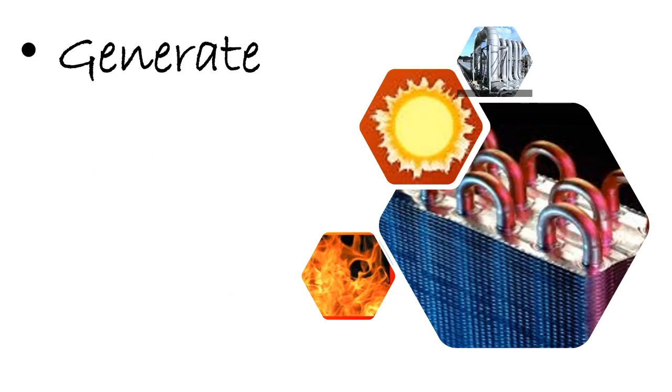Now, when we look at heat as utility people, as people who are ensuring the right amount of heat is available for the processes, we generally deal with generation of heat. That's where the boilers, heaters, or anything comes into it. And then we need to transport this heat from the point of generation to the point of utility where it is absorbed.

So our choice for any of the heating media generally depends on these three factors: how easy it is to generate, or what is the right method of generating it; what is the method of transporting it, and what are all the associated risks, costs, advantages, disadvantages with that; and then, how do we absorb it, when we are absorbing it, what is right to be done?

Okay, today's session, what we will do is, we will generally start from generation and then go to absorption, but we will go a little reverse. We will start at the usage point and then go towards generation. Why? Because it is important to understand what is the criticality at the usage point.

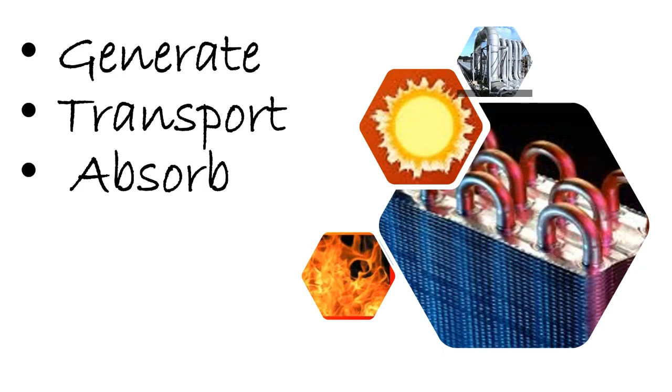Let me bring you into some of the typical applications. Now, these are just a few examples I have taken, this is not the entire list as such. If you really look at the processes I have given, it's very easy for somebody related with the textile processing unit to understand the dyeing process.

Now, when it comes to drying, there are various kinds of drying possible in the industrial scenario. Cloth drying is one of it, food drying is another part of it. There are drying operations involved in rice mills, drying operations involved in desiccated coconut mills, which are all very small scale industries.

There are also drying processes involved for something like food manufacturing, let's say a noodle machine, there is also a drying process involved in that. So drying is probably the largest application that we see in our day-to-day life.

And of course, there is printing. Printing is not limited to cloth printing, there is paper printing, film printing, plastic printing, there are a lot of things. And distillation varies from what we see for alcohol production towards any of the chemical plants, the bulk drugs and chemical plants, we see distillations over there.

Similarly, reboilers, polymerization, film and packaging is something which is the modern day requirement. And of course, there is refining of edible oil - I am not referring to the refining of oil and gas, particularly the edible oil.

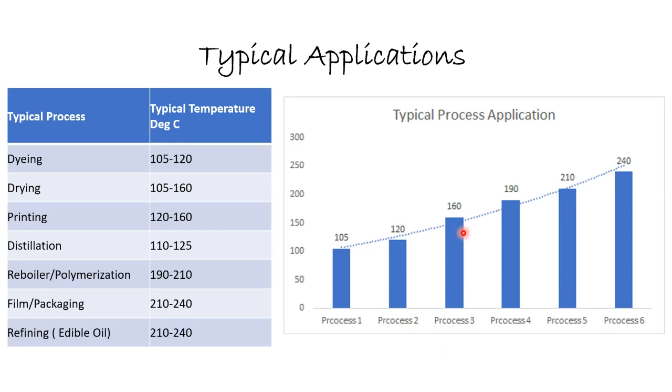Let me take you to one of the important factors today. That is what we call as log mean temperature difference. Many of you might already be knowing about it. Let me just brush up on this.

When you are absorbing heat and you have a heat exchanger, what you basically do is you put a heating media on one side and you put the media which has to absorb the heat on the other side. I have taken an example which is called hot oil and cooling water. Let us say there is hot oil going at 70 degrees centigrade, and water which has to be heated from 30 to 36 degrees.

Now, as the hot oil starts going inside, it starts losing its heat. As it starts losing its heat, the gradient is continuously varying. So the effectiveness of the heat, or if I divide this entire thing into, let us say, 3 sections, the effectiveness of the heat exchanger in one section is far higher in comparison with the effectiveness in another. So it is not only a single temperature, it is basically the temperature and area that matters.

If you have idea about finite element analysis, this is what people do. They divide the entire heat exchanger into small areas, and for each of these areas, how the gradient of heat between the source and the absorbent is actually varying is calculated, and then they design. That's the latest designing principle that has evolved, because today we have computers, we can do that, and the calculation speed can be increased.

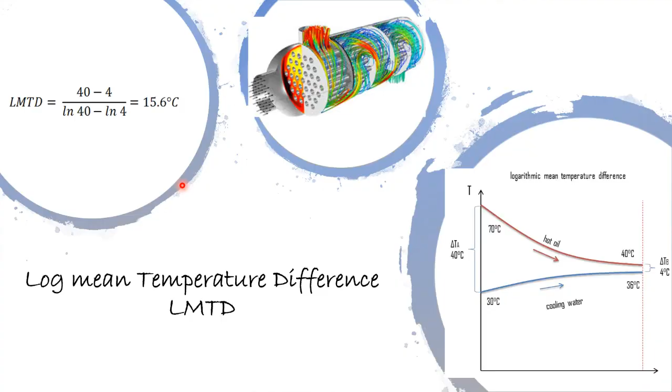Now, let us see how it varies. What is the impact of LMTD on heat exchanger sizing? Here I have basically taken a process which has an inlet at 110 degrees and 160, a hypothetical process. And if the same 160-degree temperature is obtained by using a source at various temperatures, what happens to the LMTD and what happens to the area?

Now I can get 160 at 190 degrees, I can get 160 at 280 degrees. So the area that is available, or needed, to achieve this particular temperature profile keeps on varying. Though the LMTD is linear, you will see that the area required is fairly exponential. So when you have a very high gradient heat and you have to absorb into a low gradient absorbent, you can actually reduce the size of your heat exchanger.

Now the other way around, if you want to have the source very close to where you want to achieve the temperature, then the heat transfer area in the heat exchanger will have to be higher, and the size of the heat exchanger will have to be bigger.

So this is where the choice of your source keeps fluctuating depending on what your process decides. That is going to be your source. Or if you have decided your source is having this gradient, you can reduce or increase your heat exchanger in the process. This is very, very important.

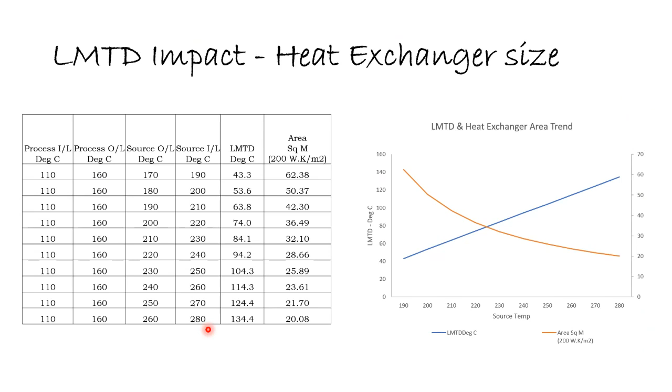So that's the first point of it. You need to understand what is LMTD. Once you understand LMTD and how the size of your heat exchanger is varying, the next important factor which impacts in the industrial environment is viscosity.

Now, what is viscosity? If you look at the two liquids which I have shown over here, it is no brainer that this is less viscous and this is more viscous. But then from the application perspective, viscosity is nothing but resistance to flow.

Why is this important? You have a source, a boiler, a heater, and you have to transport it to the place where you are going to absorb or use it. When you are transporting it in the pipeline, it is going to encounter resistance. There has to be some amount of energy that needs to be spent in order to overcome this resistance, and that is dependent on the viscosity of the media which you are using to transfer the heat.

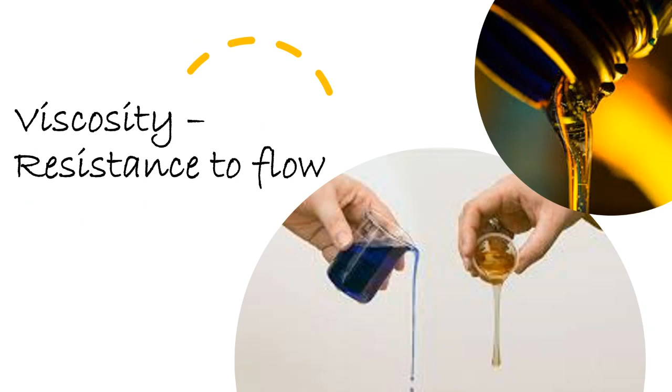You can have air, thermic fluid, water, steam, anything. Everything is going to have its own viscosity, and hence there is going to be a resistance. Now, for the things which we regularly use, let us take a look at how the viscosity plays a role.

What do you mean by all these things? The amount of energy that is going to be spent in order to move this media from one location to another is going to be higher in steam, lower in thermic fluid, and far lower in water.

But then what kind of energy are we going to spend on this is a different aspect, which we will touch upon. But there has to be energy spent in order to move this entire media from one location to another location.

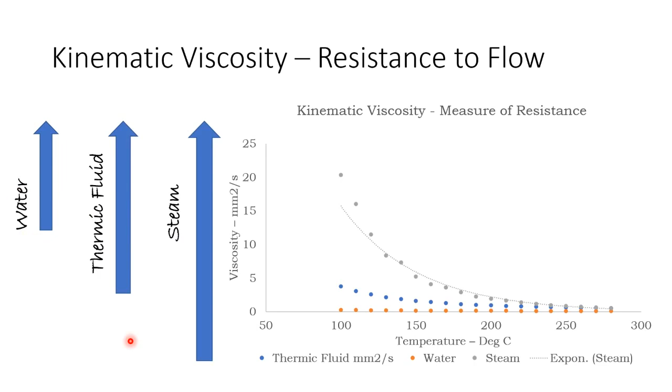Based on this, it is very clear that water has the least amount of resistance and steam has the highest amount of resistance. From the perspective of transporting energy from one location to another, prima facie it looks as though water is the winner.

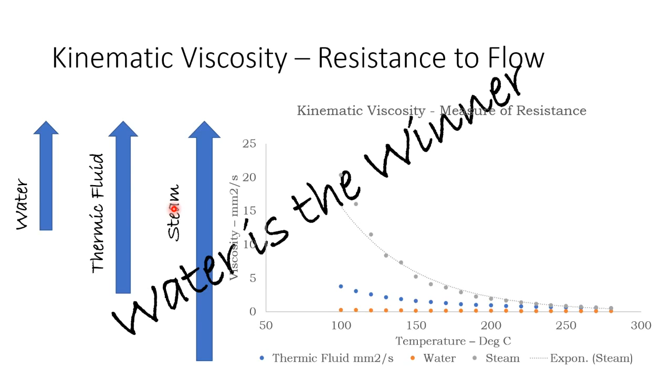So you will feel that for transporting water, the amount of energy required is less. But then what kind of energy and what is the cost of that energy could be varying, we will come to it later. Another important thing: specific heat capacity.

Why do we call specific heat a capacity? Capacity is the ability of a particular equipment or thing to hold something in itself. So specific heat is the capacity of an object to hold heat. How do we define this? I have given a simple example over here.

Let us say we are heating a steel spoon and a wooden spoon in boiling water. Now, which do you think will get heated up first? No brainer, steel will get heated up first. For every degree rise in temperature, the amount of heat that steel can absorb is very high, whereas wood cannot absorb as much.

Whenever a temperature change happens in me, the amount of heat I absorb is called specific heat. For example, if you take 4,800 kilojoules of heat using air, you need about 1,000 cubic meters of air at 6 degrees centigrade to absorb this heat. The media is huge and the temperature gradient is less, but the same heat can be absorbed by water at 11.1 degrees. So the volume of water is less, and the temperature gradient available is high. Both of these vary depending on the specific heat capacity of a particular media.

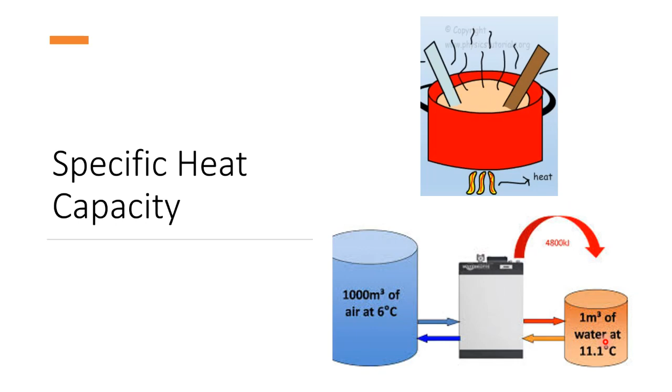For this specific heat capacity, let us compare our three media which we have been talking about. If you look at what we have plotted, even the specific heat capacity varies based on the temperature. It is not a straight line for any of the media.

But if you look at it, the specific heat capacity of thermic fluid is the lowest. What does it mean? If I raise 1 kg of thermic fluid by 1 degree centigrade, I will be able to hold only 0.4 kilocalories of heat. Similarly, if I raise 1 kg of water by 1 degree centigrade, I will be able to hold 1 kilocalorie of heat, which is 60% more heat than can be held in thermic fluid.

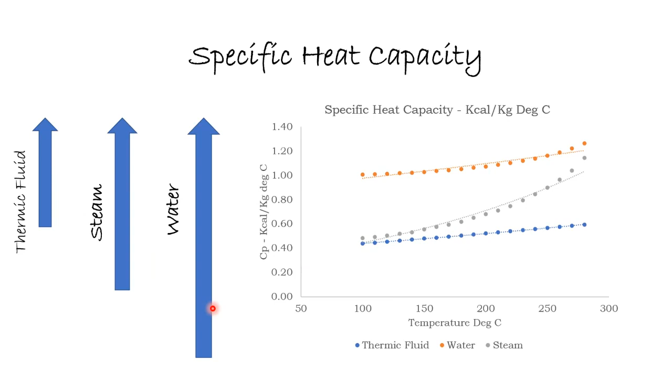But for steam, it keeps on varying. So naturally, you will feel that thermic fluid has the lowest capacity of retaining heat, steam is somewhere in between, and water has the highest capacity. So if you look at it prima facie, water is the winner. If water is the winner everywhere, then why are we using steam in most of the applications?

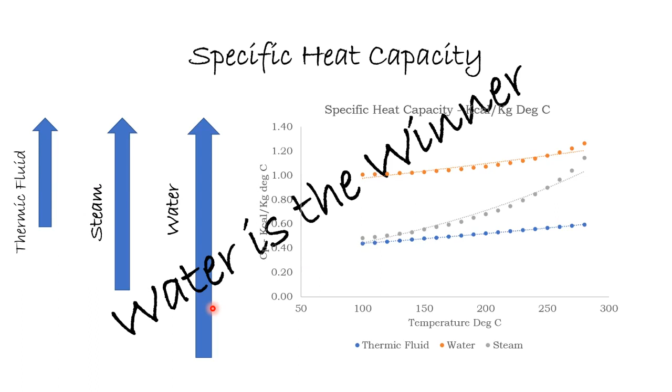But then there is a magic that happens with water. Water has a magical property. What happens when water changes its form from liquid to steam? The entire property gets changed. We need to understand that in detail, because what we are doing using steam is not change in temperature. Every time we talk about steam utilization, we say how the pressure and temperature will have to be constant. So let us understand what this magical property is all about.

This is a temperature enthalpy curve which basically shows how water behaves. When water is at 0 degree centigrade, it is basically solid. As you start heating it, it gets converted into liquid at 0 degree centigrade. It is changing its form. Whenever the form of a particular media is changed, you find that the temperature remains constant.

But the beauty with water is that when the form changes, the new form is very stable, unlike what you see in thermic fluid. If you convert thermic fluid from liquid to vapor, the entire property is lost. What remains with you is only charred carbon, which is of no use and is only a nuisance. But water is not like that. When you change its form, the property is actually much better than what it was.

So water, when you start heating it, rises in temperature, and at 100 degrees centigrade at atmospheric pressure, it stops rising in temperature. It will keep absorbing heat, but the temperature rise will not happen, and it will start changing its form. This heat that it absorbs in order to change its form from liquid to steam is called the latent heat of vaporization.

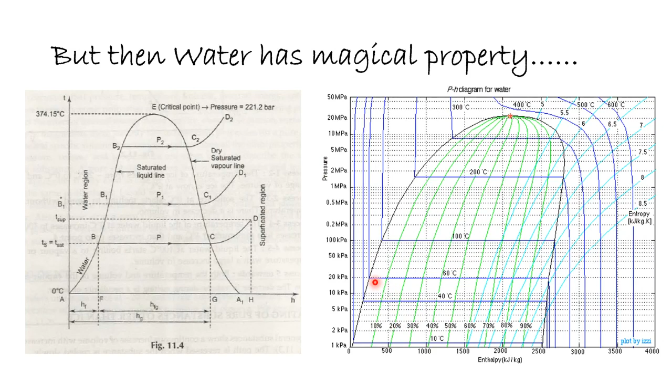Now, if you look at the latent heat of vaporization, there are two important aspects to understand. One, if you increase or reduce the pressure, the point at which boiling happens, that is the point at which phase change starts, keeps on changing. At atmospheric pressure, it is 100 degrees centigrade. Lesser than atmospheric, it is 60 degrees centigrade, it could be 60, it could be 40. In fact, there are machines which employ boiling water at 3.4, 3.5 degrees centigrade.

That is where we look at our vapor absorption machines, vapor absorption chilling. So what is to be noted is 100 degrees centigrade boiling is at atmospheric pressure. You can create a vacuum and start boiling water at lower temperature, at which it will absorb the heat and get converted into steam.

But from the process perspective, from the absorption perspective, what we have is steam which we condense and absorb the heat. If you look at this curve, as the pressure starts increasing, this width, which is the enthalpy, starts reducing. So when you absorb heat at a lower pressure, water actually has the ability to give out a lot of heat.

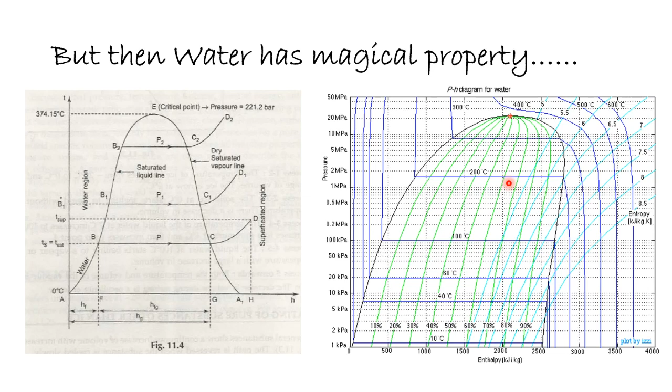Whereas in comparison with a higher pressure, it is going to give you out a lesser amount of heat. So as the gradient of temperature increases, the quantity of heat available with the steam keeps on reducing, which is usable heat. The overall heat could be high, but the usable heat keeps on reducing. Let us look at how that fares in comparison with water and thermic fluid.

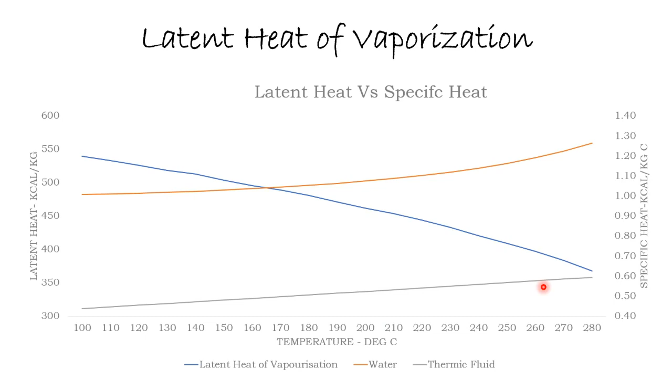Now, if that is the case, then why thermic fluid? Thermic fluid is going to carry heat, but if you want the same amount of heat, look at the volume of thermic fluid you have to handle. It is 500 times more, 400 times more. Steam is going to carry 400 times more amount of heat.

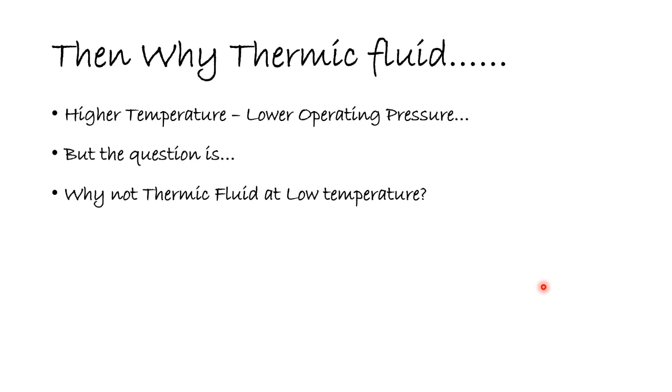Then many of you would already have the opinion that higher temperature means lower operating pressure in thermic fluid, whereas in case of steam the pressure is going to be higher. Agreed, let us keep that point aside for a while and ask a question. But the question is, why not thermic fluid at lower temperature? There are many people who say, sir, 280 degrees temperature works, so 150 degrees will also run, 160 degrees you can also use. Why not thermic fluid at low temperature? What is the break-even criteria for changeover from steam to thermic fluid?

What is the gradient of heat at which you need to be looking at changeover from steam to thermic fluid? Is it at 120 degrees? Is it at 150 degrees? Is it at 200 degrees? Is it at 280 degrees? What is the right thing to use?

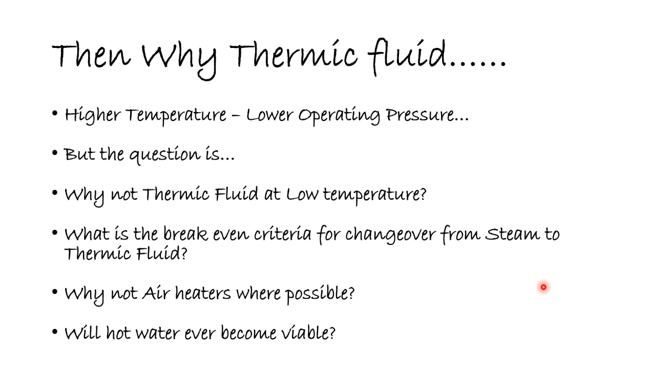If that is the case, why not use air heaters wherever possible? For drying applications, you all use air heaters. Now the question is, will hot water ever be viable? If thermic fluid and air heaters are there, then why is hot water required? Though water has such beautiful properties, why are we not using hot water in majority of applications? Why are our processes always linked to steam or thermic fluid? So what's the right source for my application is the question.